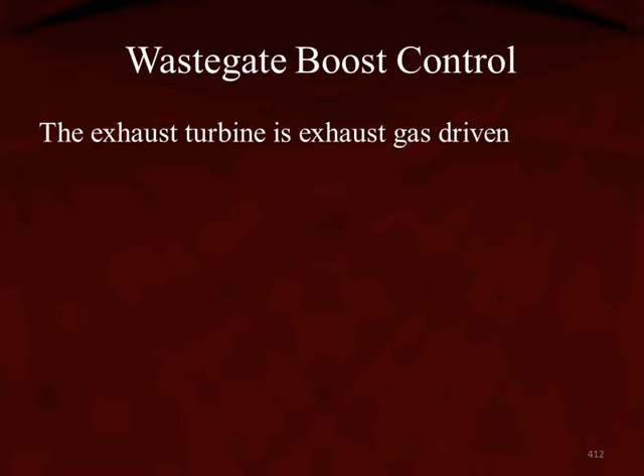Wastegate boost pressure control is very important. The exhaust turbine is gas driven. Now that means the amount of boost that the turbocharger is going to create varies with, of course, the pressure from the exhaust. Now the exhaust gets higher in pressure as RPM goes up. So the higher the engine RPM pressure, the higher the boost pressure.

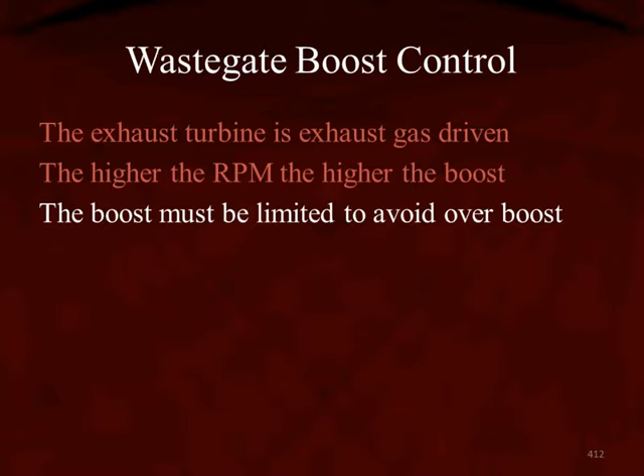This has to be controlled in order to prevent an overboost, something that can damage the engine, an overboost condition. The boost has to be limited. Wastegates are very simple valves. A wastegate is essentially a device that bypasses some of the exhaust flow around the exhaust turbine, and that's to control maximum boost. The wastegate is controlled by an actuator.

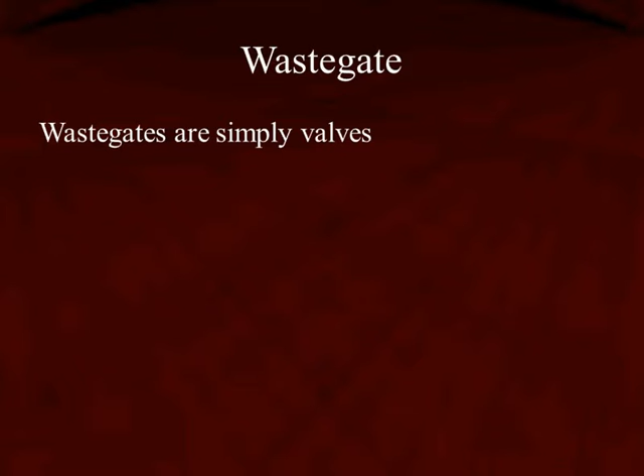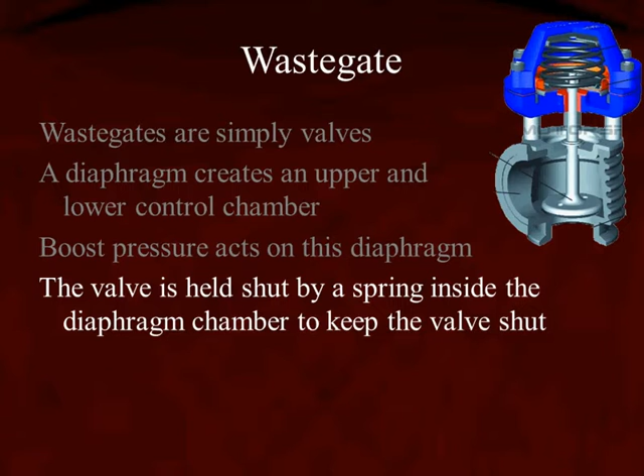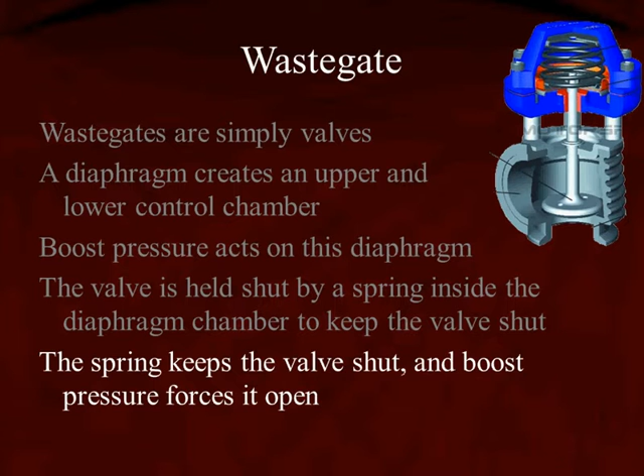This valve is held shut by a spring inside the diaphragm chamber, and that's to keep that valve shut, so we have a zero wastegate action. The spring keeps the valve shut. The boost pressure forces it open.

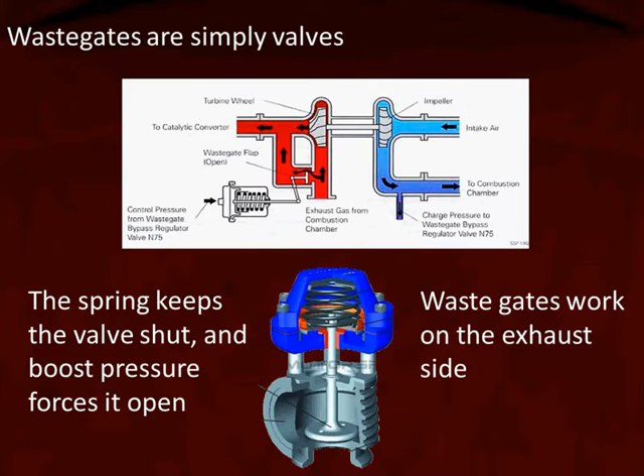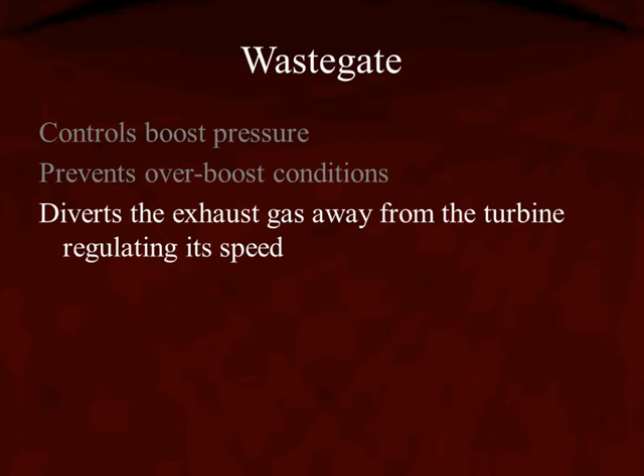When we look at the top there, that graphic shows us red and blue, and the red is the hot side or the exhaust side, and that's where the wastegate is working. It works on the exhaust side. It controls pressure, it prevents overboost condition, it diverts the exhaust gas away from the turbine, regulating its speed, thus regulating boost, avoiding maximum boost or overboost conditions.